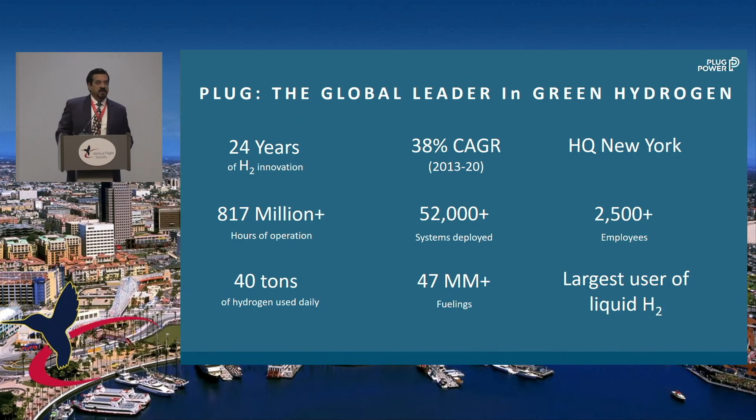We currently use with our customers today at the sites well over 40 tons of liquid hydrogen a day, making us one of the largest users of hydrogen out there. We've done well over 47 million fueling events with our customers at different sites. So we consider ourselves a leader both in hydrogen, now going forward with green hydrogen, but also in fuel cell systems. We started out in 2014 really focused on the material handling application.

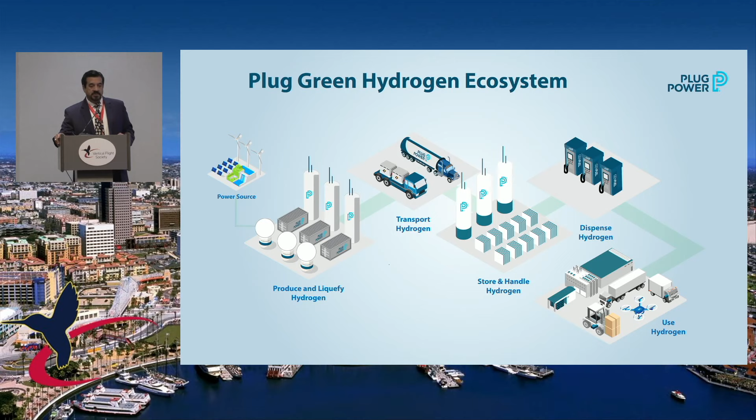We've got dispensing capability, I've got a little bit of slide on that coming up. But recently we've also decided to get further integrated into the hydrogen ecosystem, and I'll talk a little about some of the acquisitions we've done in the last couple of years. Now we're in a position where we're going to be generating, liquefying, and distributing green hydrogen on a much larger scale, through our own acquisitions and the companies we've acquired and the development we're doing.

As it relates to aviation, a lot of the work we've done in the past has now brought us to the point where this application is really, really interesting for us, not only from a fuel cell perspective but also from a hydrogen perspective. We start to think about the decarbonization that needs to happen both here and all over the world. Aviation has a place in that decarbonization. So it's really important for us, as we look across the applications and the strategy for Plug, where do we see the applications, where do we see the need for green hydrogen, and where do we play in those spaces?

We're developing what we're calling a line of ProGen engines. The 125 kilowatt is at the highest power level for this product family right now. We may go higher in the future. It really is focused on both the larger aviation applications, but also a version of it will be used for probably heavy-duty applications, Class 7, Class 8 trucks. So it's a platform we think we can build on for multiple applications.

As it relates to the aerospace industry, we're really going to metal plate stacks. We've got some development work going on where we're looking at titanium plates. We've got that design complete, we've got tooling on order, and we expect to deploy those and get them out by the end of this year. It really allows us to scale and get to where we need to be from an energy density standpoint, not only for this application but for other applications, and it's positioning us well.

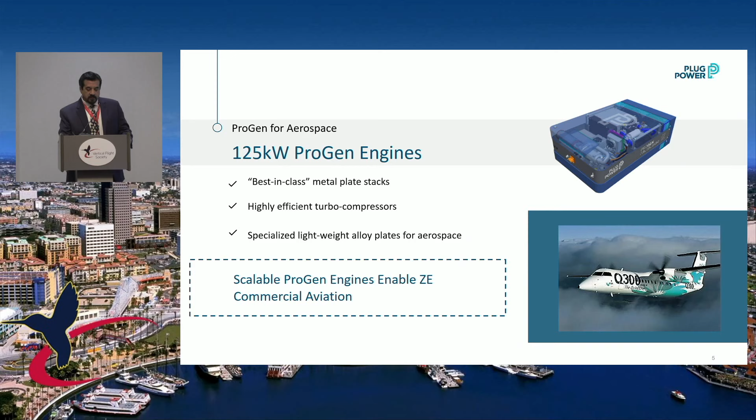I know Arnold is going to be coming up and talking here in a minute, but I did want to mention our partnership with Universal Hydrogen. It's pretty important to us, and it's around a turboprop development that we've got work going on with them. They're working very hard on the actual integration, the actual fueling pods. We're working with them closely on the fuel cell itself.

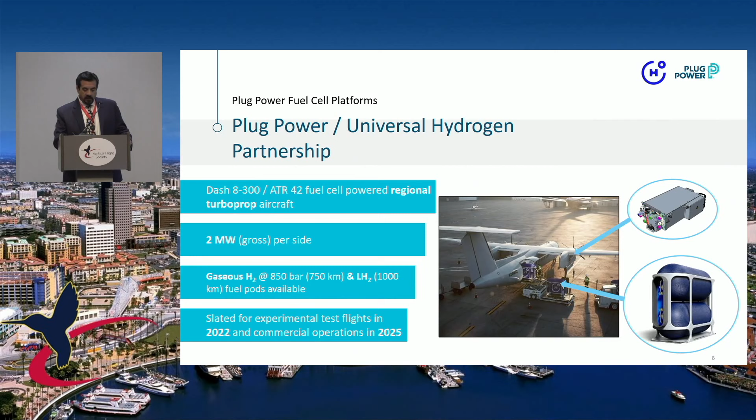There are some activities slated for flight tests sometime this year, and then commercialization sometime in the 2025 timeframe. When we look at the partnership, as I mentioned before, we're not just going to be providing the fuel cells.

We think there's a great opportunity for us to provide green hydrogen. A lot of people throw around colors, but our simple definition is we're using electrolysis, feeding the electrolyzers with renewable energy, whether it's wind, solar, or hydro. Lots of people use definitions of carbon intensity, and we prefer that too, but for the sake of discussion, when we talk about green hydrogen, it's from renewable energies. We think there's an opportunity with this partnership for us to provide that green hydrogen, with Universal really focusing on the integration, the pods, the logistics and the ecosystem at the airport for fueling, as well as the FAA certification activities for the vehicles.

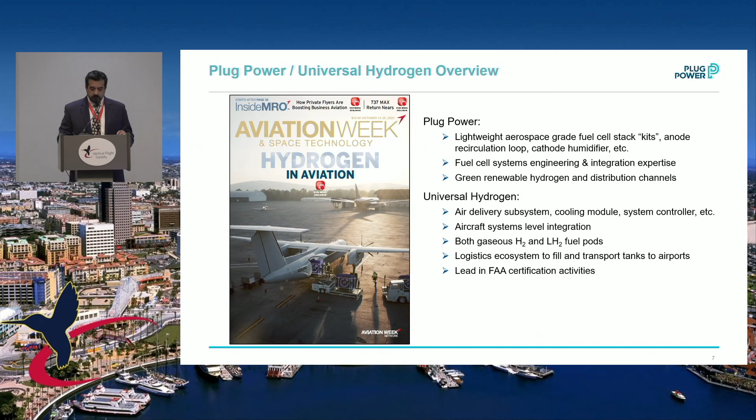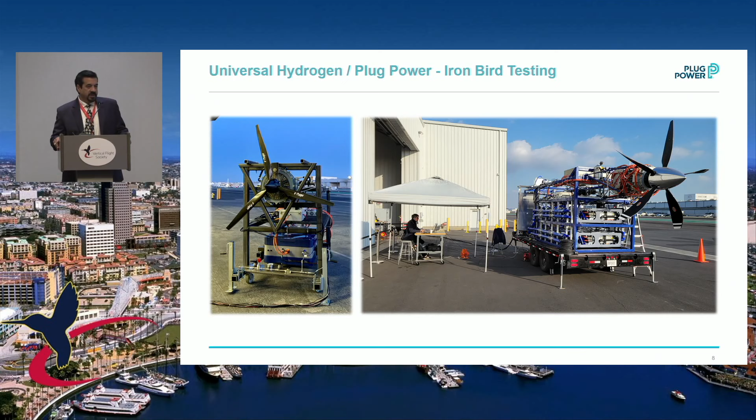We've got some other partnerships I wanted to mention that we're looking at. Particularly Airflow, a short takeoff and landing aircraft passenger and cargo application, as well as Heaven Drones, where we're doing some work on long duration, extended flight times, and heavy lift capabilities. So there are many opportunities within the aviation sector with respect to fuel cells and the hydrogen application.

When we think about hydrogen and its place within this application, there's 40 years of experience in the chemical industrial industry as well as space that we can take advantage of. From an energy content by weight standpoint, we all understand the benefits hydrogen has, and the flexibility it can bring from both a liquid and gaseous perspective.

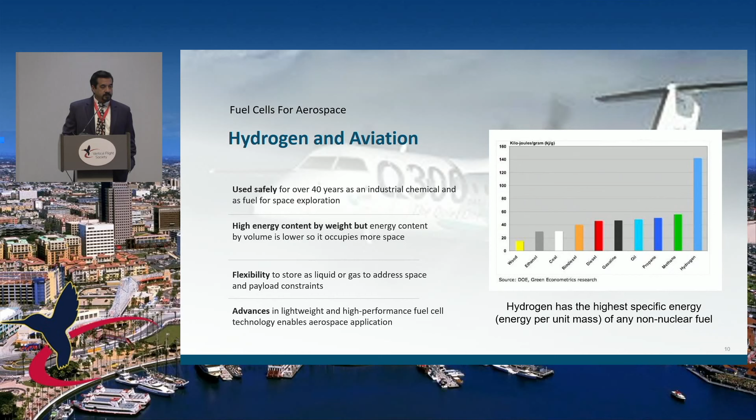But there still need to be advances made in the fuel cell application specifically to get the weight and densities to where they need to be. We think about other things required: how do we think about the actual tanks that hold the hydrogen? The mass of those needs to be reduced significantly. How do we get that down? How do we get more hydrogen into the vehicle? How do we get the higher specific power I mentioned before? And how do we manage the thermal aspects of the propulsion system?

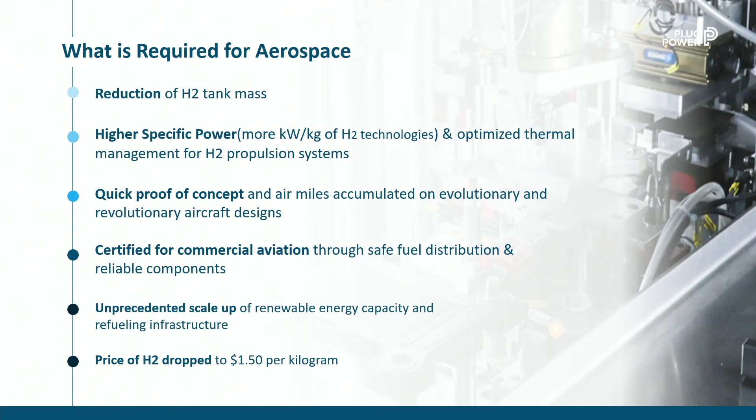Some of the other things that need to happen is how do we have quick proof of concepts where we can actually get flight time and experience, because that really goes into what's needed to certify from a commercial aviation standpoint when that happens. And then scale up -- we mentioned that at the very beginning. Scale is going to be very, very important to support this application as well as others.

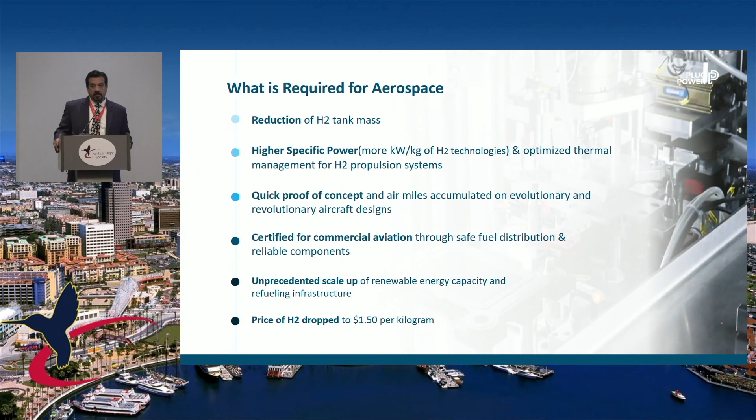We believe we can actually get the cost of green hydrogen down to about $1.50 per kilogram, which we think opens up a lot of markets and opportunities, not only for this application, but for others.

Recently, last year, the president signed some legislation, and within that legislation there were some interesting things included. Plug Power and the other members of the FCHEA, the Fuel Cell and Hydrogen Energy Association, spent a lot of time and energy working on the wording for the legislation. There are three items within that legislation that we feel are very, very important.

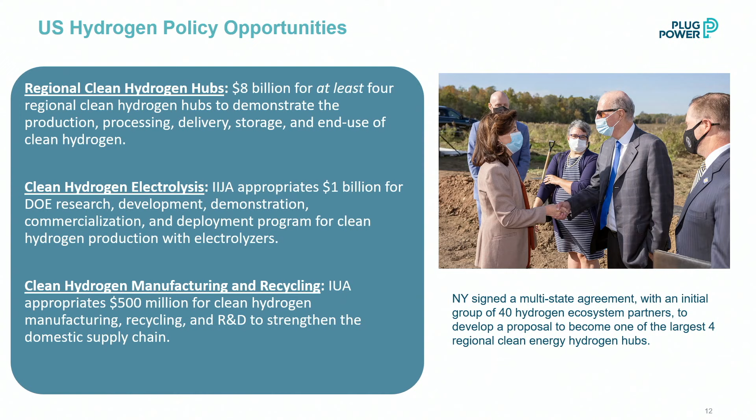The first is the hydrogen hubs. There's about $8 billion earmarked for at least 4 regional hydrogen hubs. They have to be low carbon -- they don't all have to use renewables, but they need a carbon content less than 2 kilograms CO2 equivalent per kilogram of hydrogen generated. Within the hub, it's about thinking how you tie the generation, distribution, storage, and applications together.

Within the New York Northeast area, we're working with NYSERDA, the energy R&D arm within the state of New York and other surrounding states, to put together the hub. We're thinking about across the region, what are the applications and how do we move the hydrogen.

And how do we store it? Some really interesting applications you think of are ports, and it's not just seaports, but also airports. There's lots of opportunities in maritime for the use of hydrogen and fuel cells, but also at airports. I'll talk a little bit about the entire airport ecosystem and how that fits in.

The second piece is electrolysis. There's about $1 billion earmarked for research and development and deployment for clean hydrogen production from electrolysis. The last piece is manufacturing and recycling, so you think about the full life cycle of some of these elements and systems. How do we invest in the recyclability of this equipment, and how do we ensure that the domestic supply chain for those materials is strong? Those are really key elements of the legislation.

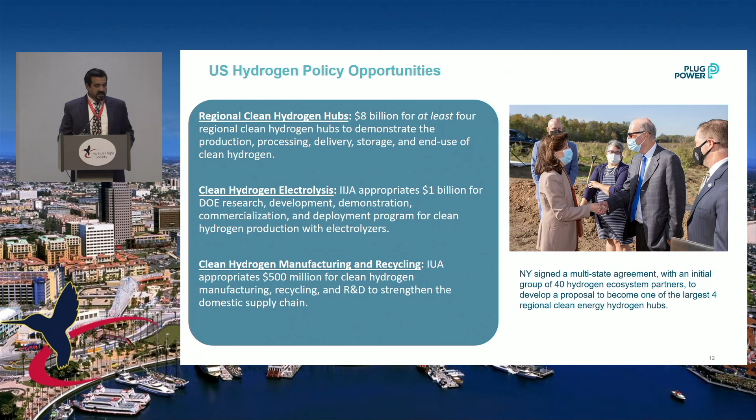They're trying to understand how they can do their energy transition from mostly a fossil-based solution to a cleaner solution. I was in New Mexico a few weeks ago with Universal, and the governor there had put together a roundtable to figure out how New Mexico, and they've now signed an MOU with Colorado, Utah, and Wyoming, can put together a hub for that region so they can be applicable in terms of the story and the resources available in that part of the country. And obviously here in California, there's a lot of work being done for a hub.

But there's a lot going on and there's lots of opportunities. I think $9.5 billion sounds like a lot of money, but in reality, when you think about what it's going to take to scale this hydrogen green economy, it's not really that much. The important part is getting it going, understanding how these systems work together, how you can generate, distribute, and store hydrogen, and get it to applications at a cost point that allows you to scale this. That makes the system something where hydrogen is more ubiquitous and easily available, so people don't have to worry about where it's going to come from in the future.

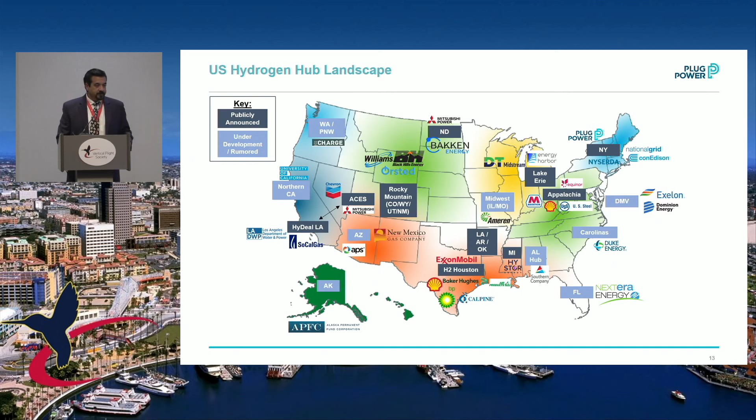So for us, in addition to the hydrogen generation I talked about, we have the capabilities for and design hydrogen refueling stations. As I mentioned, we've got over 165 fueling stations installed across the country with our customers. That's small systems, 20 kilograms a day, all the way to about 2 tons a day. We can get those deployed quickly because we've done a design that's modular, very simple to deploy, and we can utilize both liquid hydrogen as well as gaseous delivered to the site.

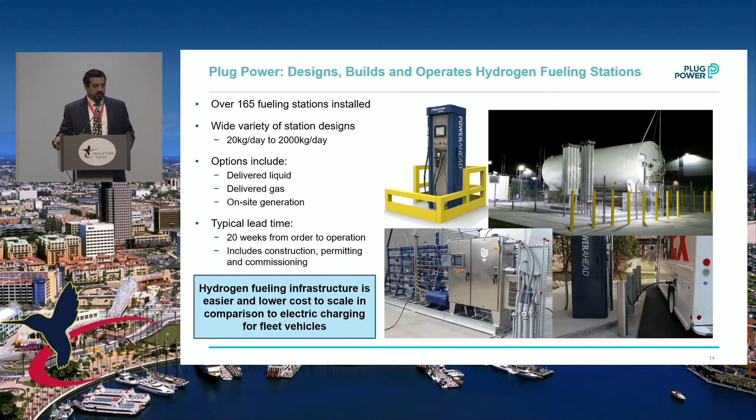We can also generate hydrogen on site with our electrolyzers. It's a significant aspect of getting not only the hydrogen generated but also distributed to the applications that need it most. Andy Marsh, our CEO, really believes this particular application is important to decarbonization. He's talked about how important it is, not just from a pure aviation application, but also from the entire aviation ecosystem - the ground support equipment, the shuttles that take passengers from gate to gate. So how do you think about that entire ecosystem? It's really important, and from his perspective, it's an application in an industry that's really important to Plug.

So how do you think about decarbonizing the entire operations with green hydrogen? It really comes down to thinking about all those pieces and places, and that chart highlighted some of those. It's really about how you build that all together so you can take advantage of the scale, take advantage of having hydrogen at the location, and utilize it in more than one application. McKinsey did a study about the evolving landscape associated with using hydrogen in the aviation sector to decarbonize across the entire operation and value chain.

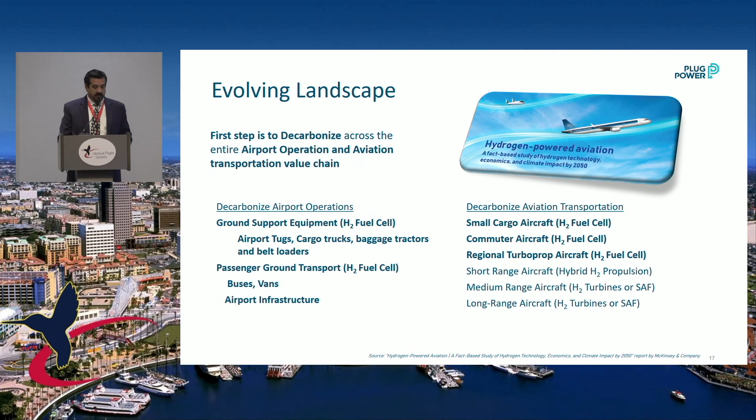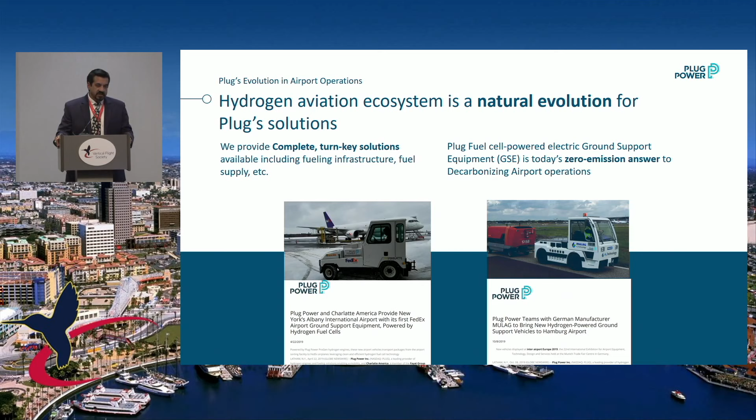From an overall ecosystem standpoint, on the bottom left that's the Albany Airport. FedEx is using fuel cells in some of their tuggers, with our full turnkey solution where we're providing hydrogen, the refueling infrastructure, and the fuel cells for the equipment. On the right, there's a piece of equipment at the Hamburg Airport that we also have a fuel cell and we're providing hydrogen to. These are just examples of where we can get to zero emissions vehicles with green hydrogen and fuel cells, and it doesn't take much today because we've got the equipment, the technology is there, and it's basically low-hanging fruit from an application standpoint.

When we think about the cost, I mentioned before $1.50 per kilogram, you have to ask yourself: how do we get there? It really comes down to a few things. Scale drives everything. I think everybody knows that regardless of what industry you're in, scale is really, really important. And when you think about scale, that really drives down the cost of capital and the CapEx, the cost of the equipment itself. As you build up the equipment, it starts to get driven down. The supply chain gets built up, there's more players, more suppliers, more competition, and that's really good to drive the cost down.

We've also seen a significant decrease in the cost of renewable energy. We've found in many locations across the United States and even Europe that the cost of renewable energy is very, very favorable for generating hydrogen, and it continues to go down. We hope that some of the additional legislation coming out, hopefully with Build Back Better, there's a production tax credit and an investment tax credit in that legislation for hydrogen, and that would also help drive down the cost.

And then the cost of capital, getting funding—there's lots of investors now. People really want to invest in green technologies, so we think that the cost of capital is also going to come down. That's really going to help the main initiatives to drive us to $1.50 or lower for a kilogram of hydrogen.

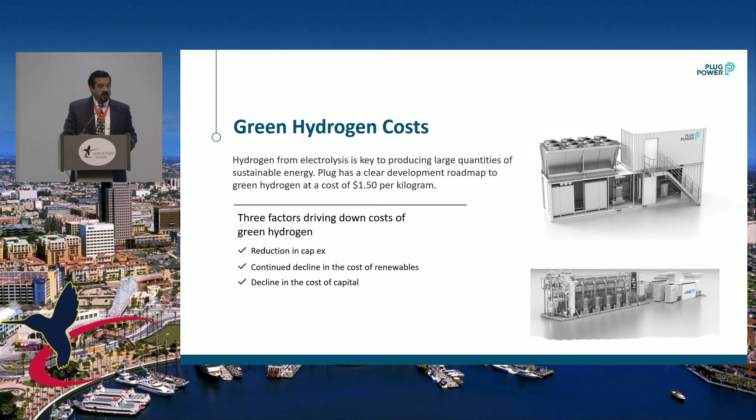When we think about scale, we're building right now—I was there last week—getting close to finishing that facility, a gigafactory in Rochester, New York, in the western part of the state. In 2024, when it's fully up and operational, we'll be making over 7 million MEAs, 7 million bipolar plates, over 60,000 fuel cell stacks. We can build over 1 gigawatt of electrolyzer equipment. We're also doing on-site generation, using our own electrolyzers at that site to generate hydrogen.

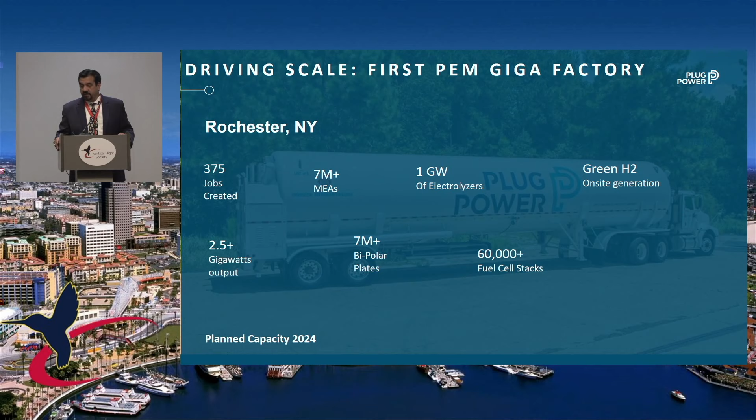But what it really means is, how do we take this and replicate it in other parts of the country, other parts of the world? As part of the hub activities we talked about, factories and investing in large-scale manufacturing are really going to be important to drive the cost down and get the scale up. Scaling globally is also really important.

So we've done a lot to scale globally in recent times. We've done a couple of JVs—we've got a JV with SK in South Korea, a joint venture with Fortescue in Australia, and one in France with Renault. The JV is called Hyvia, and that's to put together fuel cells and systems for light commercial vehicles, which Renault is very, very good at.

And then you think about manufacturing—as I mentioned before, that gigafactory, how do we take that and replicate it? So we've got plans to replicate that in other parts of the world. Again, scale is the thing that's going to be so important to all of us as we build out this economy.

So I mentioned before that we've gotten into the green hydrogen space, and we did that back in 2019. We put together our 5-year plan, our 5-year strategy for Plug. And when we did that, we really made the recognition of how important hydrogen had become to Plug. We really wanted to sell fuel cells originally, but hydrogen started to become really important to us and to our customers.

It became important for a few reasons. One, the cost. We needed to be able to drive the cost down. Two, customers had started to ask how they could take advantage of hydrogen to meet their internal sustainability goals. So all these corporations we're working with are starting to get pretty aggressive sustainability goals, and they want to see how they could take advantage of the fact that they were already using hydrogen, and how could that hydrogen help them in the future.